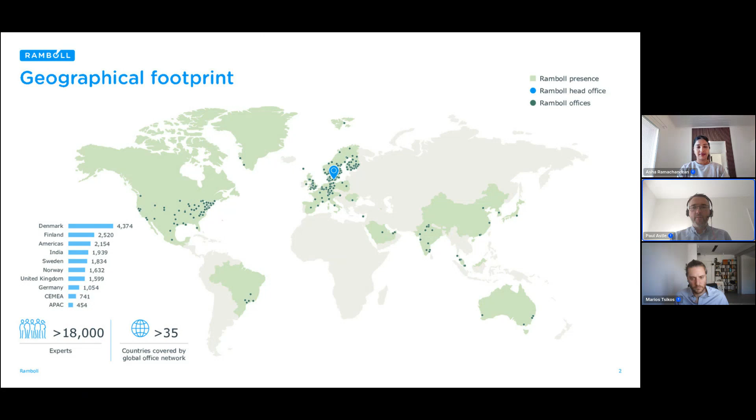So just a very brief recap on the impact of buildings in the EU. So it'll come as no surprise that they have a significant impact. You know, 40% of energy consumed in the EU is in buildings. Over a third of the energy-related GHG emissions also come from buildings, and between 5 and 12% of emissions are associated with material extraction, manufacture, and renovation of buildings. That's the embodied carbon, and that's one that often is missed in recent years, but it's something that we've got to be addressing as well. So collectively, a really significant impact from buildings in the EU, and we've got to do something about it if we're going to meet our carbon targets.

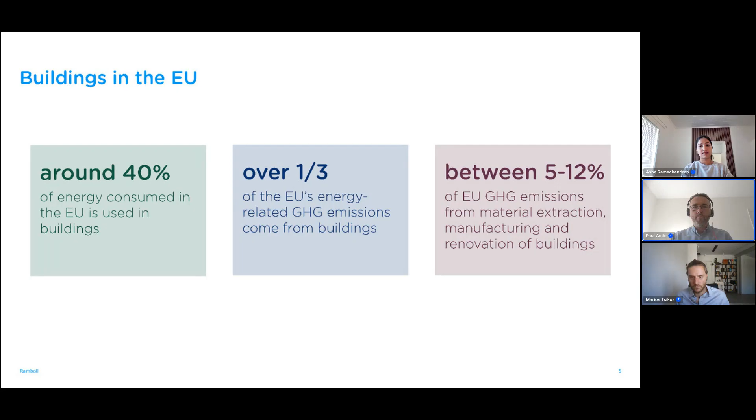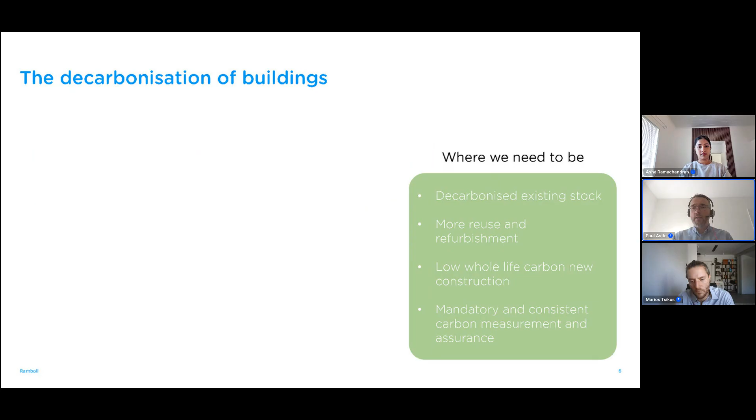Now, in terms of where we need to be, what we want to have is a fully decarbonized existing stock. Most of the buildings in the EU will continue to be around beyond 2050. So we need to make sure those existing buildings are decarbonized. We need more reuse and refurbishment. We don't have the carbon budget to rebuild all the time. We, of course, need to have very low whole life carbon new construction where we do require new buildings. And we need mandatory and consistent carbon measurement and assurance to make sure we're all working to the same rules and we're all working towards the same goal. That's not where we are today.

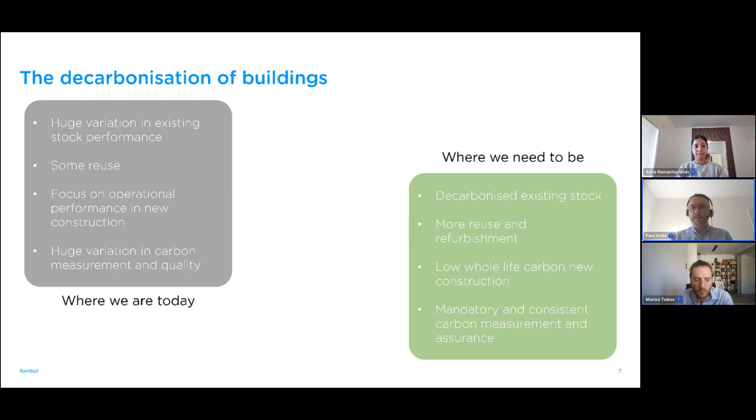We have a really huge variation in the performance of existing stock, some very poor quality leaky buildings, some very efficient buildings. Some reuse is happening in pockets of the EU, and there's some really great examples, but they're still quite rare. There's been a focus on operational performance of new construction, which has been very important, but now we need to embrace this idea of whole life carbon in new construction as well. And there is actually a huge variation in carbon measurement and quality. We see big differences in the methodologies, not only between different member states, but sometimes within those member states, as well as varying qualities. So we need to address that if we're going to have this consistency that we need to deliver a low carbon future. And that's the purpose of the EPBD, the recast EPBD, which was published last year.

It's recast because it's largely rewritten, and it includes a whole range of different elements to tackle all of these different challenges. Now, today we're just going to focus in on the whole life carbon element, but it is worth being aware of some of the other things as well that are captured in there that look at renovation as well as energy performance too.

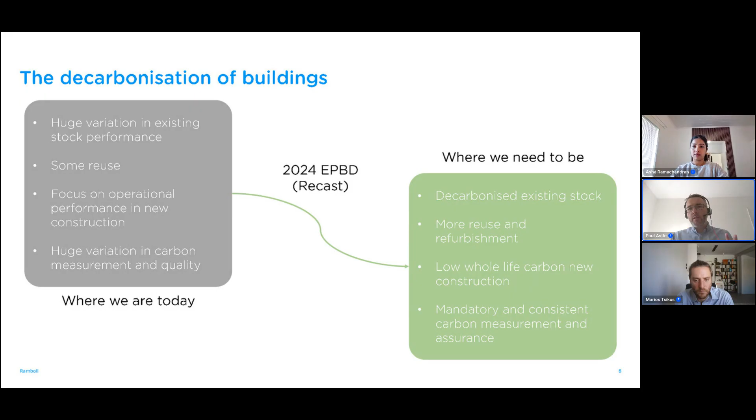But if we just focus in on those carbon assessment requirements, there's three fundamental things that it's important to be aware of. First of all, there's a requirement to measure and disclose life cycle GWP. Secondly, there's the requirement to have a target and limit value for GWP. And finally, there's also the requirement to adopt a common approach to that calculation. So three different elements there, which collectively really seek to address a lot of those challenges related to carbon.

And just in case you're not so familiar with that term, life cycle GWP, we also often refer to as whole life carbon. And just for information, the disclosure of those carbon performance will be in the energy performance certificate of the building. So whilst we may be used to seeing EPCs in relation to their energy performance, the operational performance, we're going to start seeing them including carbon as well. So it's going to become a really important document when we're looking at buildings too.

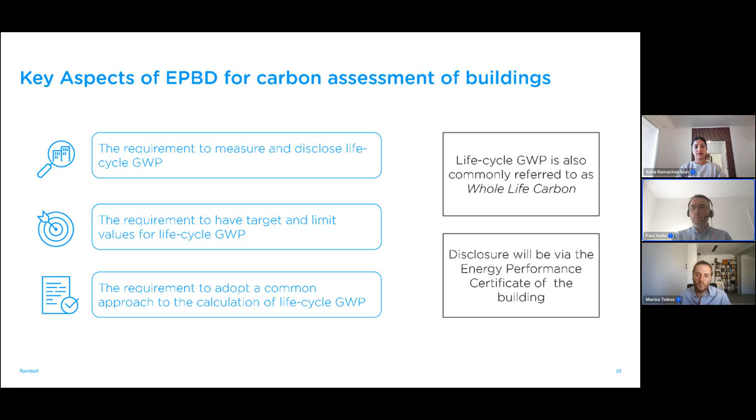Now, all of this isn't going to happen overnight. There's a carefully set out time frame. We had the EPBD, as I mentioned, published last year. By the end of this year, the EU will publish their framework for national calculation. So this is the baseline for how to calculate to meet the EPBD rules. And this is really important because we have this real big challenge right now where different countries and methodologies create quite a lot of confusion when we're trying to look at the performance. That will set up the minimum rules, and then some countries may go beyond that, but that will be the minimum rules, and I'm really looking forward to that coming out.

And then at the beginning of 2027, we're going to see national roadmaps published. So every member state will need to set out how they're going to meet the carbon ambitions of the EPBD, and then they're going to have to set out the limit values as well, although that can come a bit later. But what this means is that over the next 12 to 15 months, all member states are going to be working very hard to do some research and baseline the carbon in their new construction in order to set that roadmap out. So lots of things happening there for that.

And then by the beginning of 2028, we'll have a requirement for disclosure of carbon in large new buildings, so those over 1,000 square meters. And then by 2030, all new buildings will need to disclose life cycle GWP, but also comply with the limit values as set out in their country roadmaps. So there's quite a lot happening. It maybe seems like a little bit of time till 2030, but actually, when we look at the number of changes that need to happen in the industry, that's a short time frame. So there's going to be a lot of exciting but challenging changes to come.

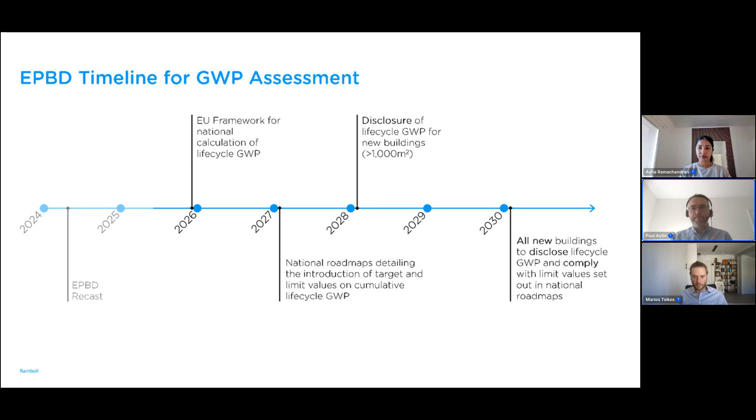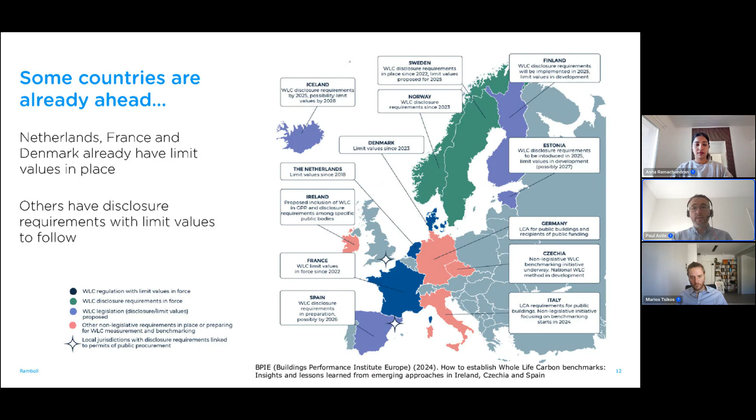Now, not all countries are starting from scratch on this. Some of them are ahead of the game, as it were. So Denmark, the Netherlands, and France have already got limit values in place. In fact, Denmark is in its second version. I'll come on to that in a second. Other countries have already got disclosure rules in place, or they're about to come into force with limit values to follow. So, things are moving in the right direction, but the vast majority still need to significantly roll out different levels of both disclosure and limit value rules.

If we just dive in for a second on Denmark, as I mentioned, Ramboll is headquartered there, and so we have a big interest in how the rules are going to be implemented in Denmark. This is the second version of Denmark's rules already. So they brought out limit values in 2023, and they've tightened them just a few months ago over the summer as well. Those tightened limit values now include more buildings and they include more scope as well.

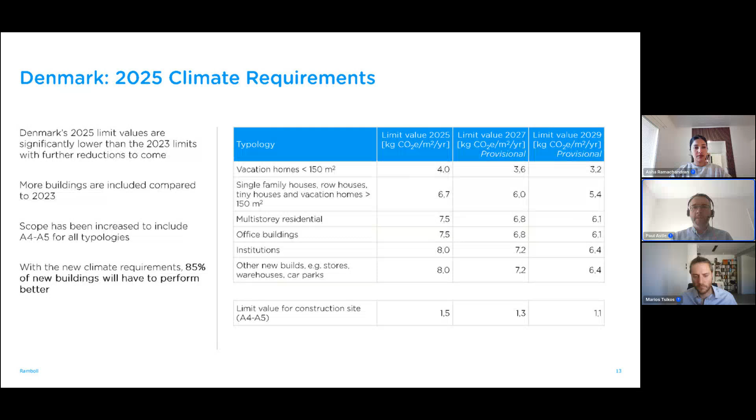So that really is trying to lift an enormous block of design practice and performance from where it is today to meet the rules in the future.

So really significant change. Now we've done even a bit more research on this because we wanted to understand what would happen to the buildings that we've already designed. So we published a white paper, available on our website, where we've taken 5 existing Ramboll projects and retrospectively looked at them to see what would happen if we were to apply the new rules to those projects.

And what we found is that actually we can meet the new rules if we use best practice materials and lots of substitution. There were a few things that struggled though - single-story buildings were quite difficult, as well as logistics buildings.

But the reality is it's not really practical for all of those projects to use those materials, because there simply won't be enough, or there'll be a lot of commercial challenges around single supplier usage. So the reality is that to meet these kinds of rules, we need to be doing things at a much earlier stage - different design approaches, trying to work out how we can meet those rules without just substitution of materials at the end.

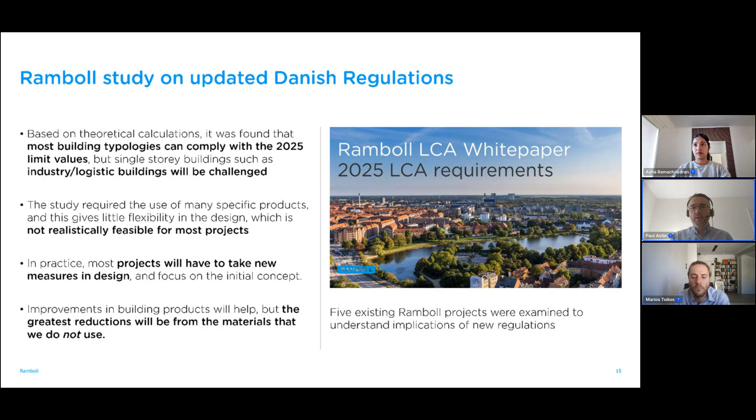So in summary, we think the greatest way to make these reductions isn't going to be substitution, it's in the materials that we don't use - through things like reuse, using reclaimed elements, as well as lean design. So it is possible and it can be delivered, but design changes are quite important to make this practical and scalable for the future.

In France, they've had rules in place since 2022 covering some typologies, and they've really started to see an impact in the industry. In a recent survey, they found three quarters of the industry - contractors, consultants, or suppliers - are reporting that decisions are being made differently because of these rules now. So people are really going to the supply chain, asking how things can be done, what options there are. It's starting to have an impact.

It's also spurred the generation of a huge number of new EPDs. It's very confusing with EPBD and EPDs, but it's spurred a huge number of EPDs, which are more rigorous than they were in the past, and that's also very important. We'll come on to that later.

It isn't without challenges though - they're still finding that including carbon assessment on their projects is adding between 4 and 7 days of work to carry out that assessment. And although that might not be too bad for a large project, for small projects that can be a significant burden to overcome. So we do need to do more work on improving automation, perhaps using AI, but certainly automation wherever we can, and the links and interoperability between LCA, BIM, and EPDs to try and reduce that burden as much as possible.

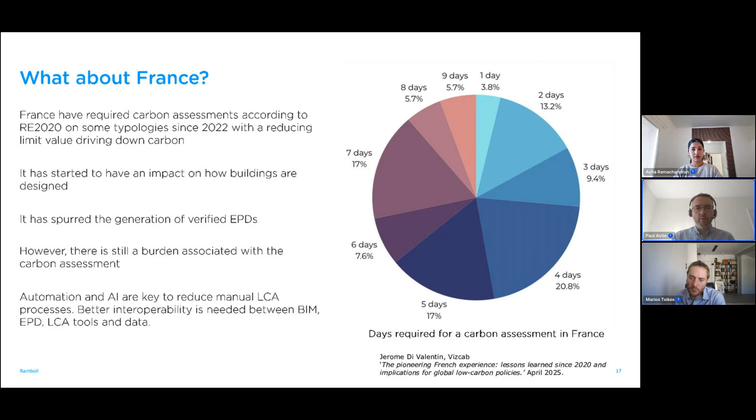So it is happening, but we need to make it a little bit easier if we're going to scale this across Europe. Now, just to pull all those things together and summarize a few points on what's going to happen, what the impact's going to be.

First of all, there's going to need to be an explosion in the demand for carbon assessments, because we have thousands of new buildings across the bloc which are going to need to disclose their carbon assessments in the coming years. So by 2028, all large buildings, and by 2030, all buildings will need to disclose their carbon measurements. So really significant demand coming.

I think the reality is we can't meet that demand right now. There's going to be some real challenges in the skills and the ability to deliver it. And so this is where we're going to need a lot more automation, maybe some AI or digital tools, which are going to allow people to meet those regulations and provide the carbon assessments without massively increasing the burden, and frankly, just being able to deliver them at all within the skills that we have.

We need lots of carbon data. None of that carbon assessment will be possible without the associated carbon data for each material in each different country. So we're going to see a lot more demand for EPDs, and also I think more rigorous EPDs too. So there's going to be a real push to generate that data.

We're going to hopefully have some standardization. One of the things I talk about a lot is the challenges we face working internationally, trying to compare projects in different countries. But I really hope that with the new rules coming out at the end of the year and the general movement and alignment in the EU, it will allow us to standardize the approach taken to measure carbon in buildings and hopefully even influence the global approach as well. So that is something which we all need.

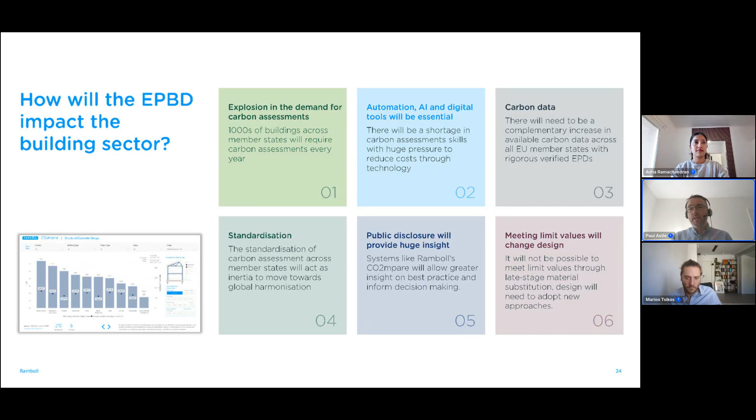And finally, to meet limit values, we can't do this just with new materials. New materials are going to be great and we're going to be able to substitute things with the lowest carbon materials, but that isn't going to be enough. We're going to have to change design. That means more reuse, maybe reclaimed elements, or indeed lean design and different approaches. So it's going to be a little bit scary, to be honest, if you're used to designing things conventionally, but actually it's also a real exciting time and a big opportunity for designers that embrace that ingenuity that we can offer to solve those problems. So a little bit scary, but also a bit exciting.

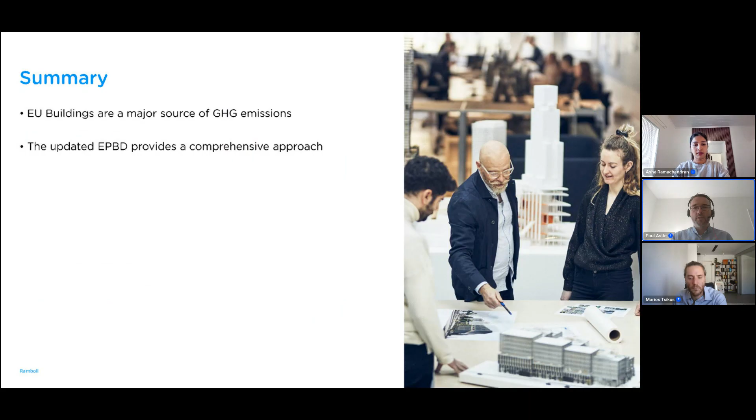If I just pull this together in summary, EU buildings are a major source of GHG emissions, both from the operational side and also the embodied carbon side. We've got to tackle that if the EU is going to meet its carbon goals. The updated EPBD provides a really comprehensive approach. As I said, we're talking about the carbon assessment piece today, but do read other parts of it because it's got a really good set of regulations covering other elements too. The most important thing to recognize is that it includes requirements to limit life cycle GHG or whole life carbon, as well as actually measure the carbon in all those buildings.

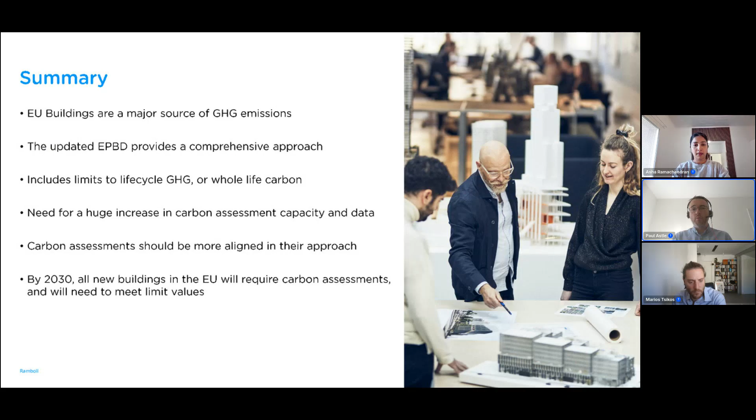There's going to need to be a huge increase in carbon assessment capacity and the data that supports that increase. By 2030, all new buildings are going to need to have carbon assessments and to meet the limit values. So really significant change coming in the next 4 to 5 years, not long at all. And finally, lower carbon materials are going to be important. They're going to help, but they're not going to solve the problem alone. You've got to be prepared to change how we design buildings. So I hope this was useful and a good overview for you, and look forward to the discussion later on.

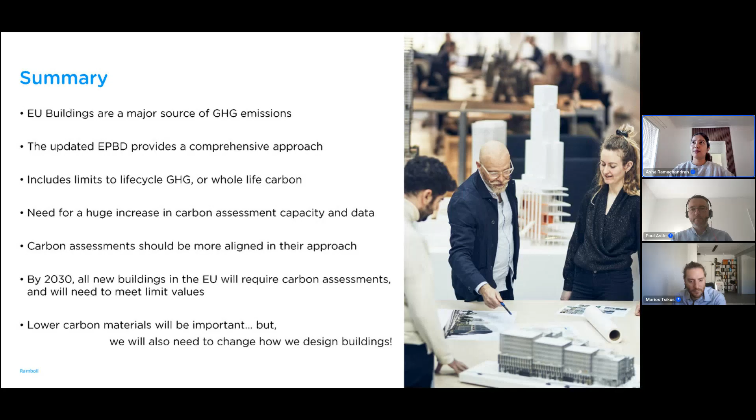Great summary, Paul. Let's now have a quick look at the details, like the detailed requirements of the EPBD, and what are the specific requirements in order to comply with the whole life carbon assessment criteria of the EPBD.

A few more words about the EPBD, which was updated last year, as mentioned by Paul. It was updated by focusing on these 4 areas: renovation, decarbonization, modernization and digitalization, financing and technical assistance. Today we will be focusing on renovation and decarbonization because both of those areas are related to decarbonizing the building stock in Europe.

Starting with renovation, there's going to be a renovation wave in the next few years, and this is something that the EPBD is trying to initiate by requiring each EU country to develop its own national building renovation plan, which will basically mandate how this renovation wave will be implemented, what will be required, and in general, how are we going to achieve a zero emission building stock across Europe. So there will be requirements for non-residential buildings, like what kind of buildings will be prioritized and how much they need to be improved, both non-residential and residential.

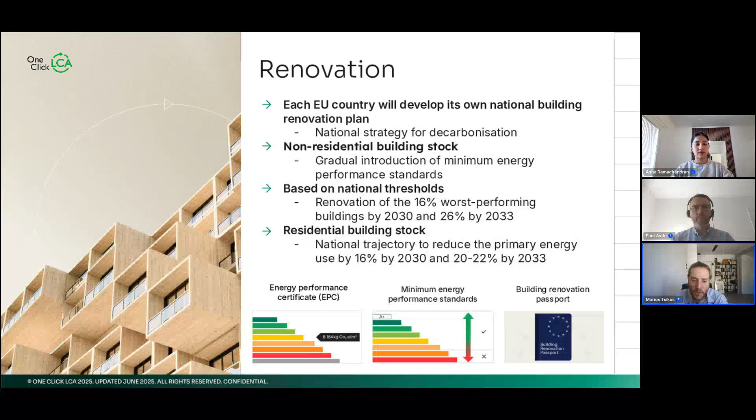With the residential building stock, it's a bit more flexible, but we still require a reduction of primary energy by 16% by 2030 and 20 to 22% by 2033, which means EU countries will be able to define their own roadmaps, but they have this incentive to prioritize the worst performing buildings, because that's the best and fastest way to achieve these goals.

When it comes to decarbonization, zero emission buildings are becoming the new standard from now on. We want all public new buildings by 2028 to be zero emission and zero energy buildings. The same for any other new building by 2030. And then by 2050, we want every single building in the entire building stock in Europe to be zero energy.

All new buildings will have to be solar ready, meaning they have to have the infrastructure in place to accommodate the installation of technologies like solar thermal and photovoltaics. Fossil fuel boilers will be phased out gradually, starting with stopping the subsidies from governments already this year.

We also have the mandatory calculation of whole life carbon emissions, which is what we'll be focusing on today. This means calculating and reporting the operational carbon emissions, just like we've been doing so far, plus the embodied carbon emissions.

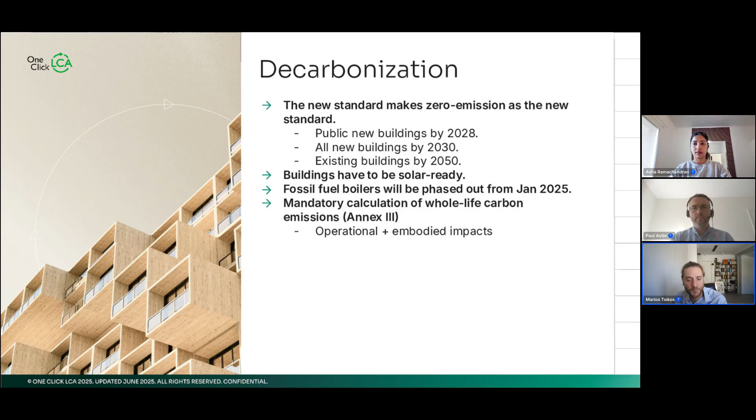This is basically a quick repetition of what Paul has already presented before, starting with the zero energy buildings and the different steps. So we start with all new buildings requiring PVs or accommodating PVs in the future. Then all new public buildings have to be zero energy buildings by 2028, and all buildings zero energy by 2030. This is where we basically start the renovation wave.

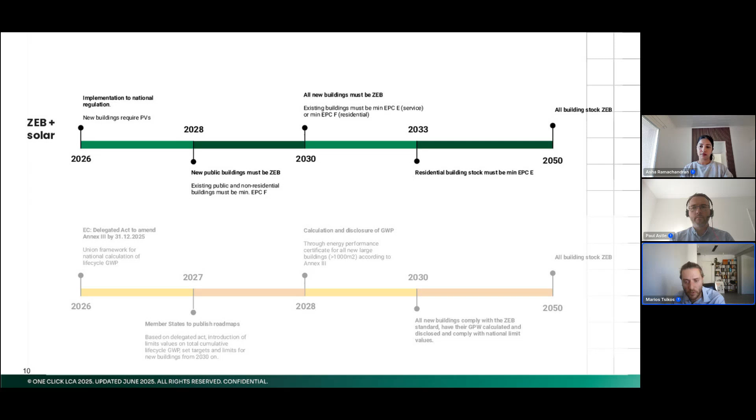So we're starting to renovate existing buildings as well. We've defined how we want new buildings to be, which is like the new standard. But now we need to start work on existing buildings too, with the aim for all of them to be zero energy buildings by 2050.

Focusing on today's topic, which is whole life carbon assessments, global warming potential, or life cycle assessments - there are many different terms out there, but essentially it's the same thing. We're calculating carbon emissions across the entire life cycle of the building, from raw materials extraction to the deconstruction of the building.

We're expecting an updated methodology by the end of this year that will tell us exactly how to do these life cycle assessments. Currently, the EPBD says to do it according to the Level(s) framework, or according to an already existing regional methodology, and according to the European standard for building LCAs, the EN 15978. But we still need more detail on how to do things consistently across the continent, which should hopefully happen by the end of this year.

Each country is required to publish its roadmap on how to implement this directive, meaning an adaptation of the EPBD directive into national building regulations. They'll also need to come up with limit values - the set performance target for all new buildings, not exceeding, say, 7 kilos of CO2 equivalent per square meter, which is what Denmark has been doing for a few years, and several other countries are already working on it.

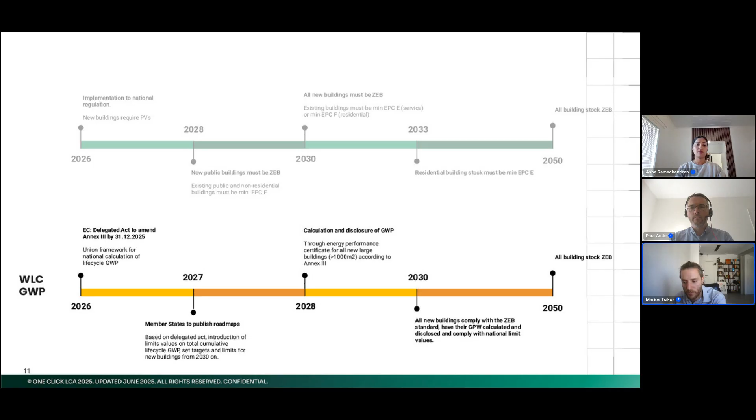A breakdown of the LCA requirements of the EPBD directive: we need to calculate global warming potential, so we don't look into other indicators, only carbon emissions, which is what matters most right now - this is what we want to handle to avoid the climate catastrophe.

The results must be reported in kilos of CO2 equivalent per square meter of useful floor area, across a 50-year reference study period, which aligns with best practice right now. All these assessments will be done according to the European standard for buildings, EN 15978. The scope of this assessment will be the same as with the Level(s) framework, but more on that and a clarification we expect by the end of the year.

Current national tools or methods that already comply with all the above requirements may also be used. But again, this will be clearer at the end of the year when we have the latest update of the exact methodology, so we'll know which current regulations in which countries align with it.

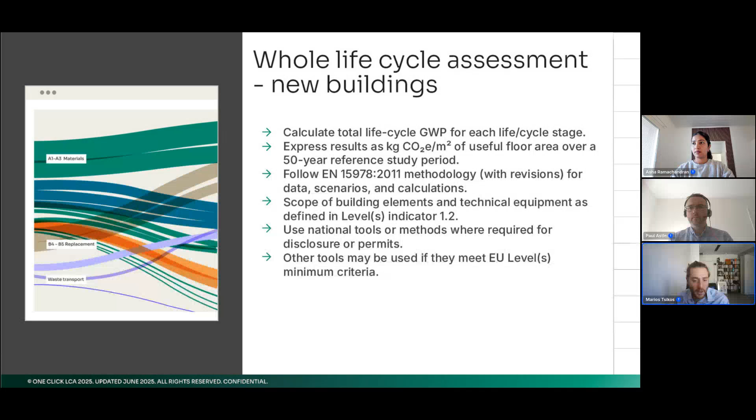And when it comes to Level(s), because we mentioned it already, the Level(s) framework, you can imagine it as a rating scheme, but not exactly rating, but it follows pretty much the same structure. The only difference is that it doesn't award credits or points like other rating schemes, for example, BREEAM, LEED, DGNB, and so on.

This means that it is voluntary. It was created or developed by the European Commission as a guidance for any design team to follow or any client that wants to verify their building according to Level(s). It might be mandatory in some cases, for example, for taxonomy requirements when this is required, because it also depends on the type of the company and the size.

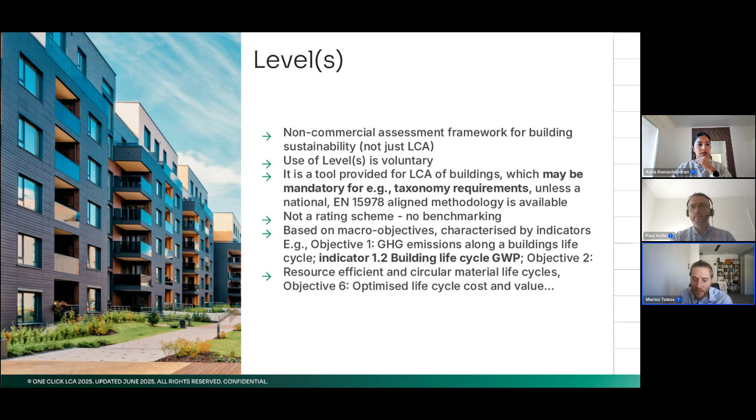And then it is also based on some macro objectives, as we will see right here. So this is basically the foundation of Level(s). Similar to the BREEAM and LEED categories, for example, we've got 6 macro objectives: GHG emissions across the building's life cycle, resource efficiency, material efficiency, circularity, water resources, healthy and comfortable spaces, adaptation and resilience to climate change, and finally, optimized life cycle cost and value.

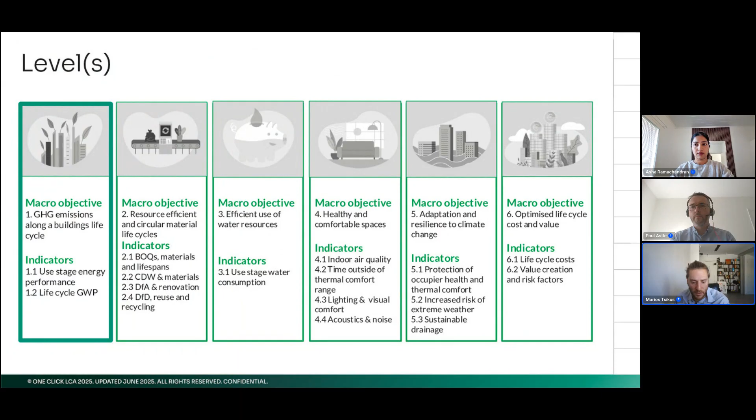Today, we're focusing on the first macro objective, which is about carbon emissions along the entire life cycle of the building. And as the name of the framework suggests, it is all the different macro objectives. They are basically organized into 3 different levels.

For indicator 1.2, which is about measuring the GHG emissions or carbon emissions, we've got a full LCA that can be done with all 9 indicators if we want, but this is optional. But as a minimum, we need to include the global warming potential, which is what is required by the EPBD. And for the purpose of

comparability, we need to align with the minimum scope of building elements. So we need to always include a certain amount or certain types of elements in our assessment, for example, the columns, the beams, the slabs, and so on. And there are also some data quality related requirements, so we all use the same level of quality, let's say, of data.

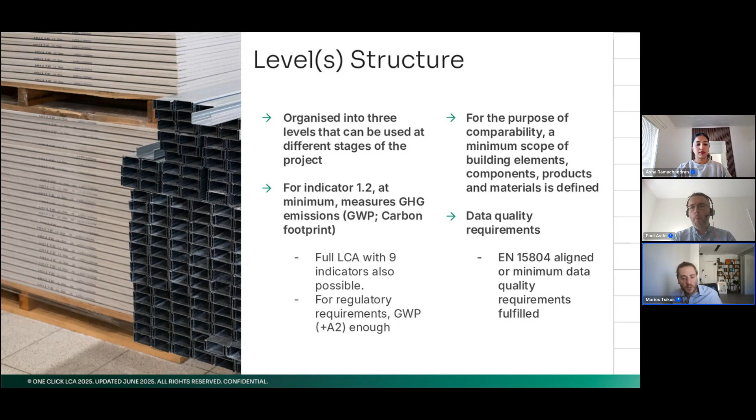And this is strictly EN 15804 EPDs, or environmental product declarations. For those of you that are not familiar, EPDs, you can imagine them as a carbon assessment, life cycle carbon assessment of a product. So instead of a building that we're talking right now, it is done for a product, for example, for 1 cubic meter of concrete, or 1 kilo or 1 ton of steel, or 1 square meter of plasterboard, and so on. So this data, then we can use them in our building LCAs.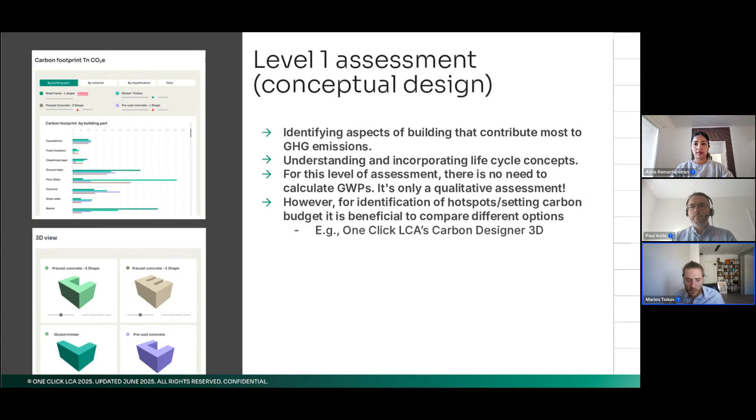So how do the different levels look like? We've got level 1, which is basically something that we do at concept design. So that means that we need to do some kind of hotspot analysis, identify what contributes the most, so that we know where to focus in the next design stages. And in this case, Carbon Designer 3D can help with doing that, because you can do some comparative analysis very, very quickly.

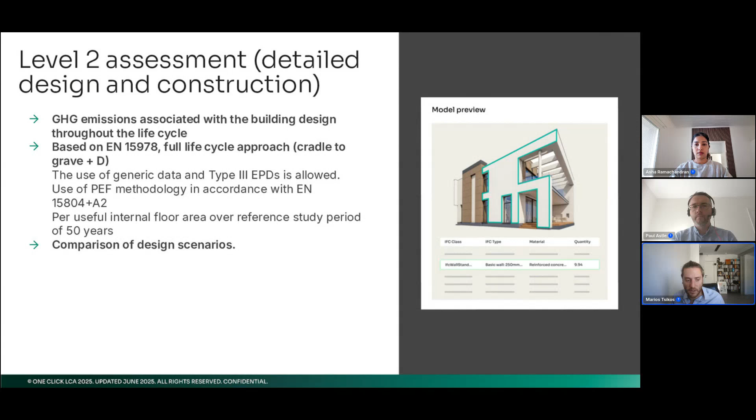Then we've got level 2, which is a proper or detailed life cycle assessment at the design stage. And in this case, we've got all these different requirements that we mentioned before, with the service life and the data quality requirements and the indicators and so on. And we need to do some optioneering at this stage, options appraisal, compare different design options, and choose and identify some carbon reduction strategies.

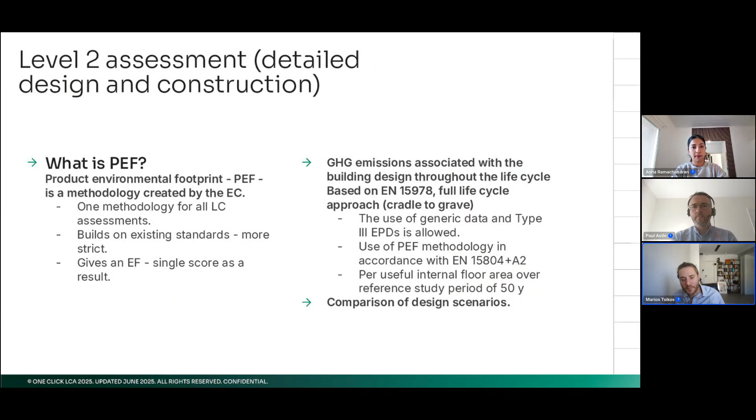I will skip that because I see that we are a bit behind the schedule. So,

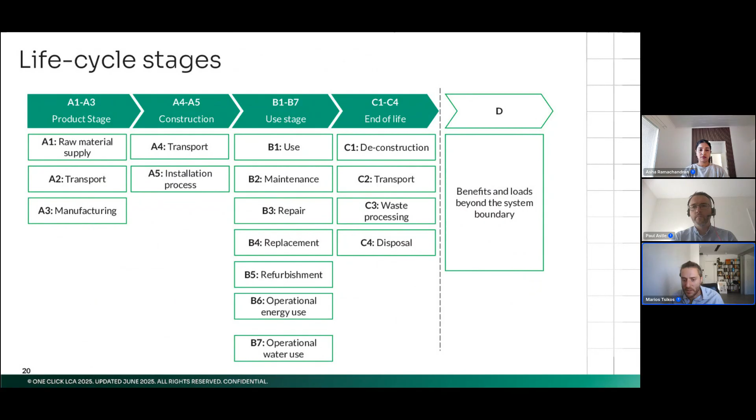life cycle stages that we need to assess. We've got the different modules, like the product stage, which is the manufacturing of the products, the actual construction process itself, the use stage, and finally the end of life of the buildings. So all these needs to be included in our life cycle assessments.

And then we've got level 3, which is the same as level 2, but the main difference is that we're doing it post-construction. So we know the exact quantities of materials, we know the exact materials and the EPDs that come with them. So we do a more accurate LCA, let's say.

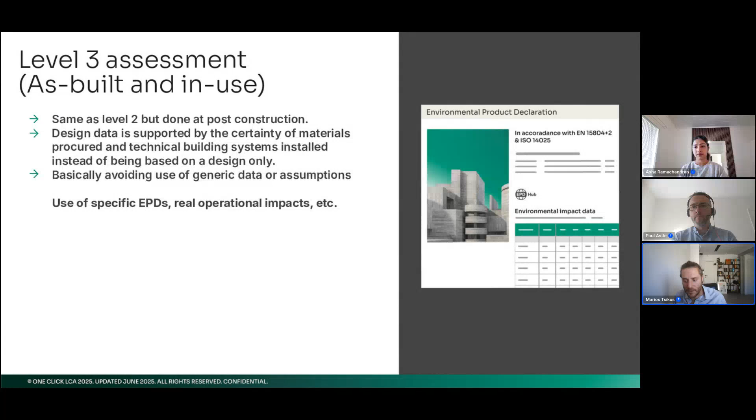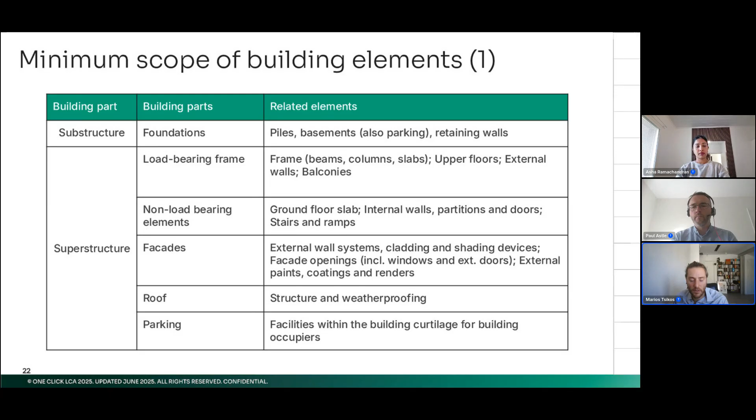In terms of the physical scope, like what kind of elements we need to include, this is pretty much the entire building. So obviously the foundations, the load-bearing frame, the non-bearing elements like internal walls, and the slabs, the entire facade, the roof, parking elements. And then we've got energy systems like heating, cooling, and electricity systems, ventilation systems, and other utilities in the exterior and the hard landscaping as well.

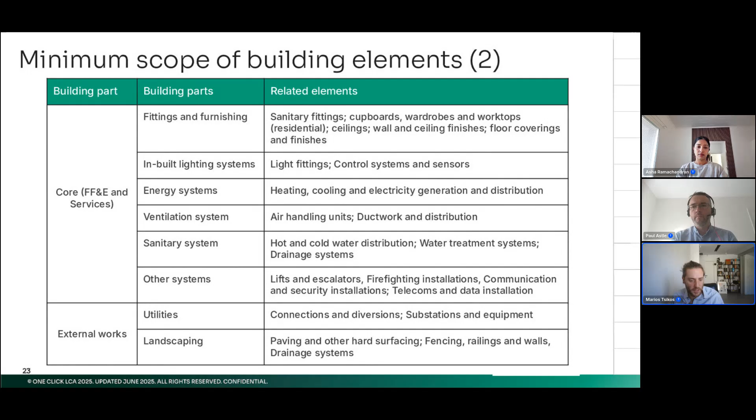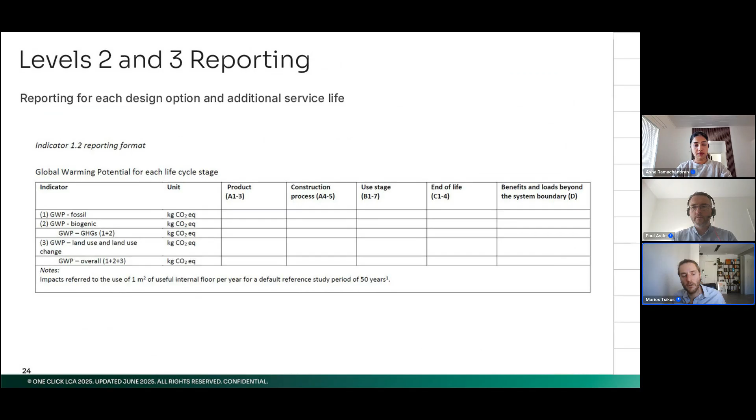We need to report things in a certain way, which is quite simplistic in this case, because we're only looking at one indicator, and there doesn't seem currently, at least, to be the need for use of any classification system. So it makes reporting a bit easier as well. So global warming potential, the three different types of global warming potential for the different life cycle stages.

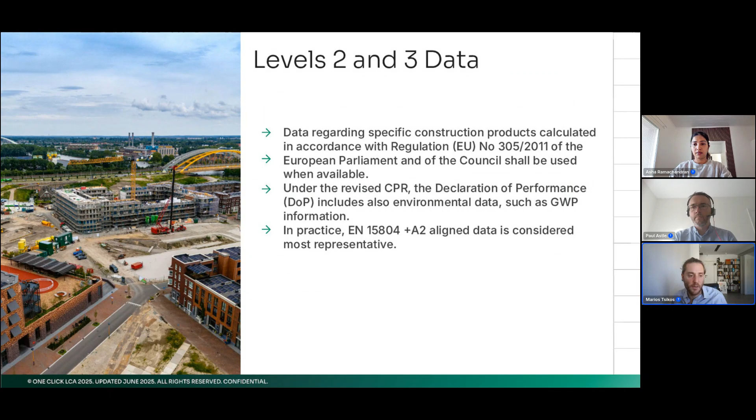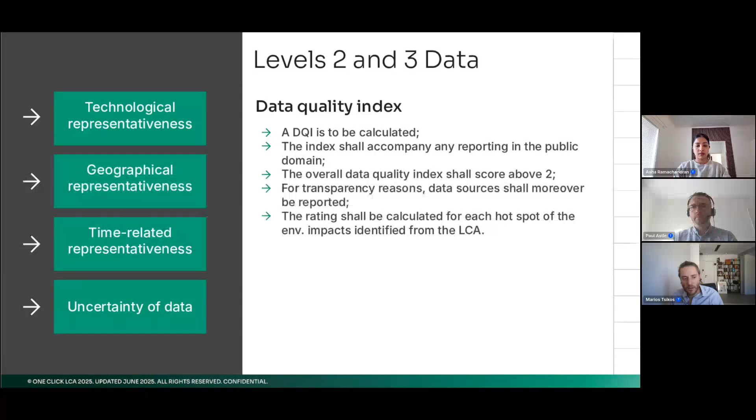As we said, all the data must be EN 15804 plus A2 compliant, which is the latest version of the European standard for the product EPDs, or construction product EPDs more specifically. And then there's also a smaller exercise that we need to do, which is about the data quality index, which needs to be calculated, and will give less or more confidence to whoever reads these results about the quality of the data that have been used. But more of that probably in a different session.

So compliance in practice, very, very quickly. We're not going to do an actual demonstration because we don't have enough time, but just showing some snapshots of the type of tools and features that are available. So in One Click LCA, we already cover all the different regulations related to LCA in Europe, where these exist. For example, Denmark, as we mentioned, Sweden, Finland, France, and so on. And we also have a levels compliant tool that can be used in any other country.

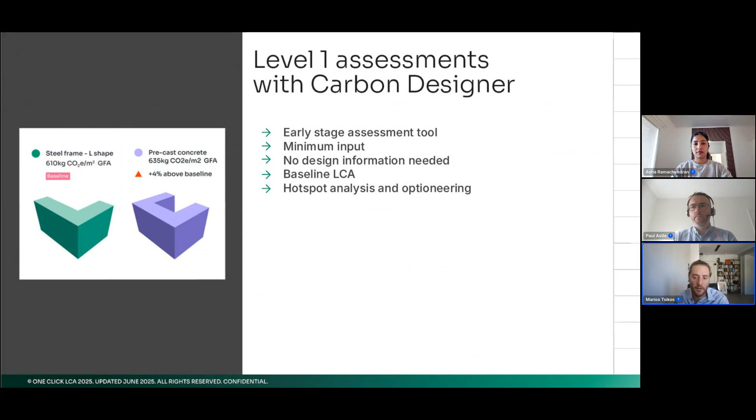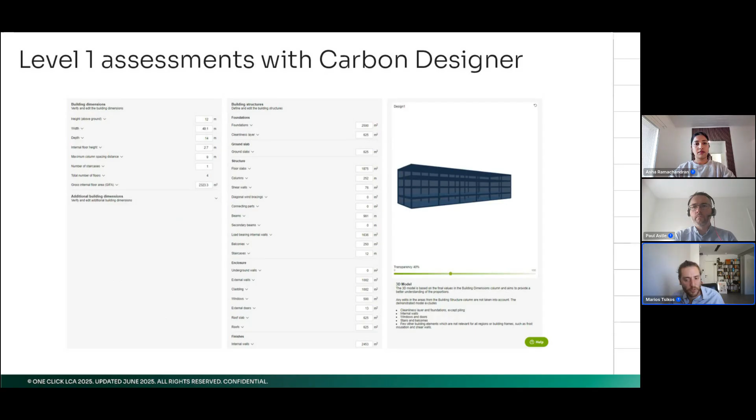We've got Carbon Designer 3D, which is an early stage tool that you can use at the concept design stage to do some optioneering, as we said, at the stage where you don't really have much data. All you know is, for example, the total area of the building, the number of floors above ground, the type of the building and the location, where you define the scope in a very rough way—let's say, for example, foundations, ground slab, the structure, the finishes, the services, and so on. And then the tool is able to make some assumptions initially, depending on all this information and the location of the building, on what type of materials are being used in that region, and do also an estimate of the material quantities.

And this way generate an example geometry for you, and also give you the results, which you can then use, make a copy of those models, and start making some changes at this initial stage. For example, changing the frame from one type to the other, or the slabs from one type to the other, to see how they compare with each other, and identify where you will need to focus from this point onwards. So not that much for an accurate assessment, but more for a comparative one.